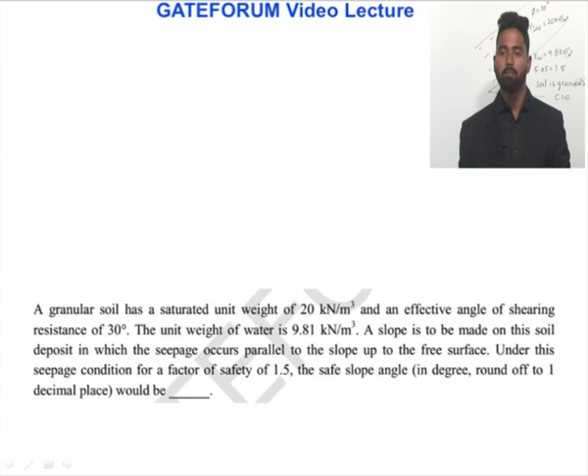A granular soil has a saturated unit weight of 20 kilonewton per meter cube and an effective angle of shearing resistance of 30 degrees. The unit weight of water is 9.81 kilonewton per meter cube. A slope is to be made on this soil deposit in which seepage occurs parallel to the slope up to free surface. Under this seepage condition, for a factor of safety 1.5, the safe slope angle would be?

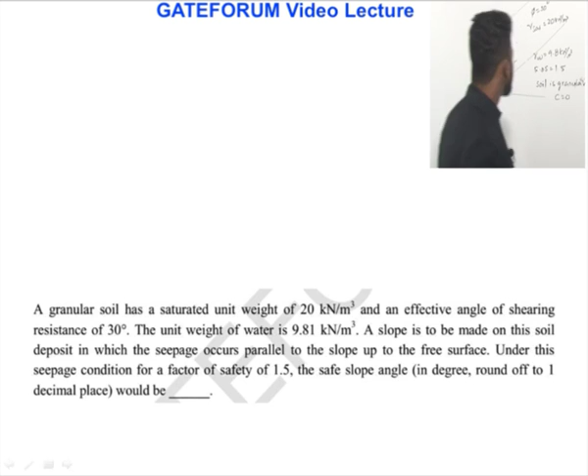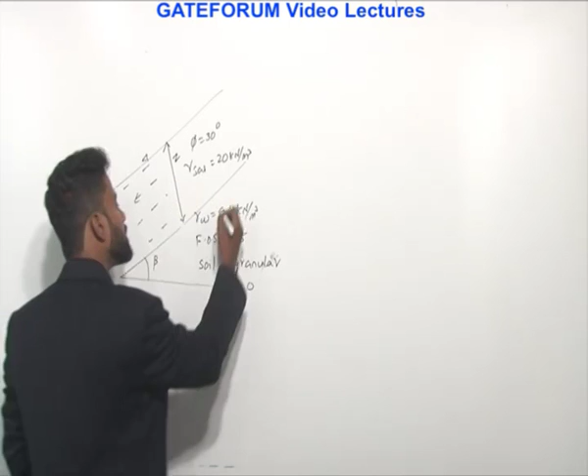So, slope, water is moving, seepage is occurring, there is soil. You can consider this as depth Z. There is soil of depth Z and phi, angle of shearing resistance, is given to us as 30 degrees. Gamma saturated is 20 kilonewton per meter cube. Gamma W is 9.81 kilonewton per meter cube. Factor of safety is given to us as 1.5.

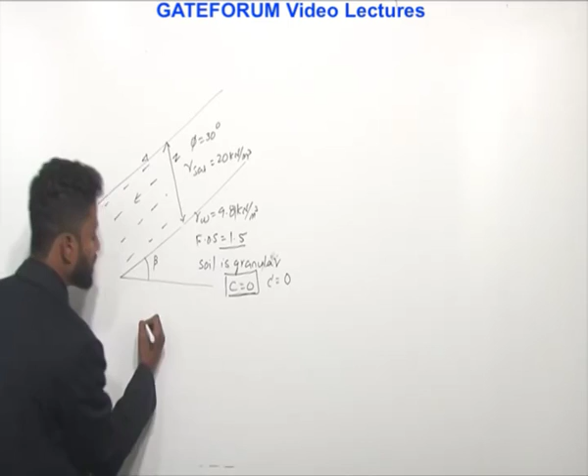He said soil is granular. Soil is granular means C value is equal to 0. That is, each and every point in the question makes a difference, so that based on that you have to say C is equal to 0 or C dash is equal to 0. The generalized form of factor of safety when seepage occurs in slopes is given to us. You can always prove this, but it's better to remember, it's time saving.

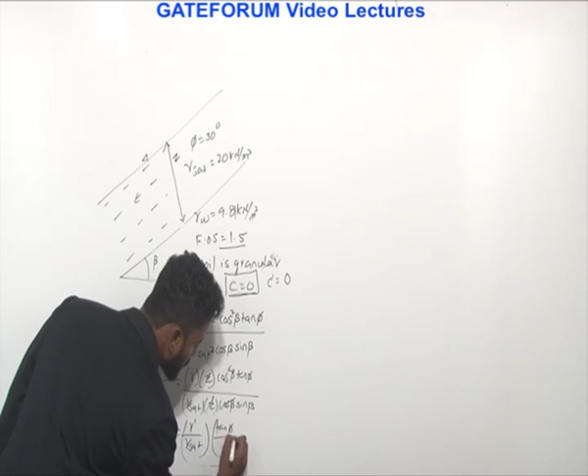Upon gamma saturated Z cos beta sin beta. Since C dash is equal to 0 and this is 1.5, you'll write it as gamma dash Z cos square beta tan phi upon gamma saturated Z cos beta sin beta. Cos beta gets cancelled. Sin beta by cos beta is tan beta. Z gets cancelled. Gamma dash by gamma saturated into tan phi upon tan beta, that is equal to 1.5.

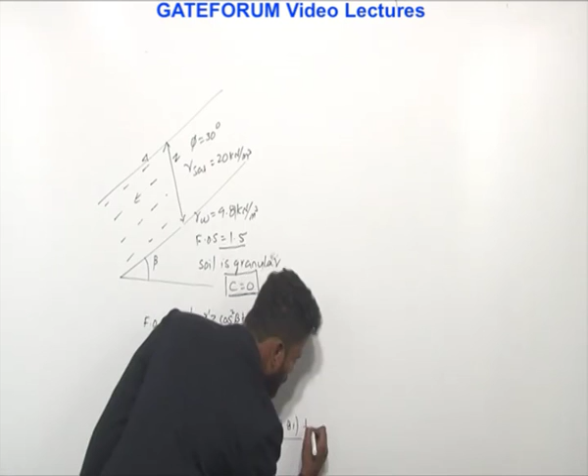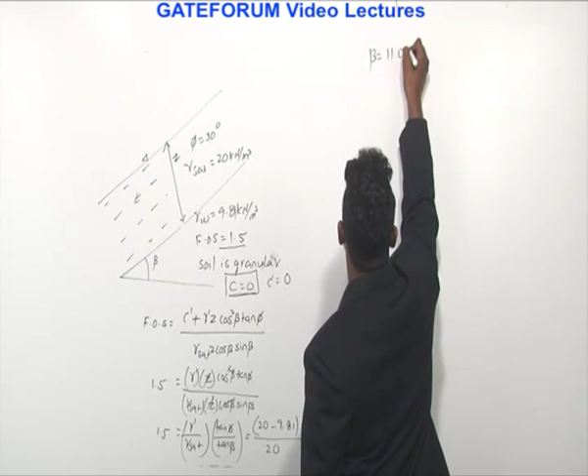Gamma saturated is given to you as 20; 20 minus 9.81 is gamma dash, gamma submerged, upon 20 into tan 30 degrees upon tan beta equals 1.5. From this you will get the value of beta as 11.09 degrees.

If it is not up to free surface, if it is only up to some amount of surface, then you have to calculate gamma effective and then do these types of problems. And if seepage is not occurring, then this will change to gamma saturated. If it is only saturated and seepage is not occurring, this will change to gamma saturated. So according to the problem, it keeps on changing. So first you have to analyze the problem and then attempt that problem.

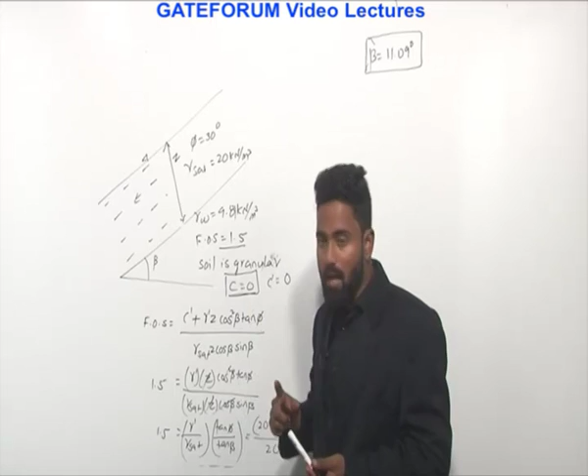This is how you will solve this, and this is the value you will get. Beta is equal to 11.09 degrees.